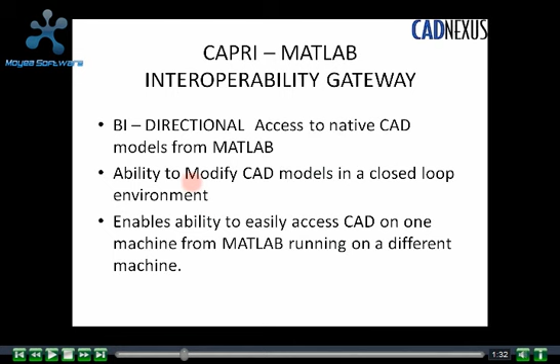What you're about to see is a demonstration on the CAPRI-MATLAB interoperability gateway. The CADNexus MATLAB CAPRI Design Toolbox provides MATLAB users with a way to access native CAD models from within the MATLAB environment. As you can see, this will enable you to do optimization, design space exploration, and analysis directly on the CAD model while maintaining associativity between the analysis model and the CAD model itself.

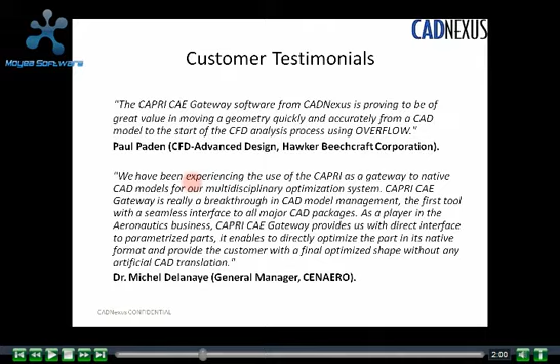In this demo, we illustrate a simple interaction between MATLAB and CAD using CAPRI. Having the CAD window open is optional, but we use it here for display purposes. More complex design and optimization workflows can be built using CAPRI functions in M scripts. So we can call methods on the CAPRI API directly from the MATLAB command line.

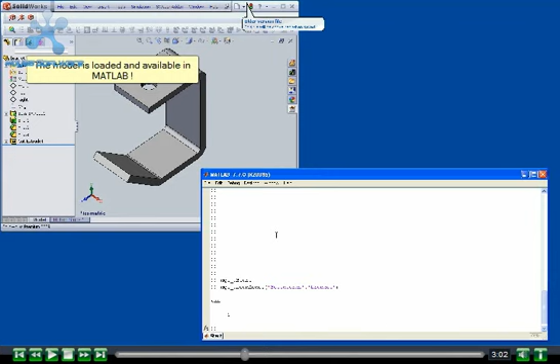So the first thing we typically do to establish a CAPRI session is execute a uStart. And once a session has been started, we can then load a model. So what I'm going to do now is load the basic bracket model into SolidWorks. Assemblies can be loaded by using the top-level assembly name. So shortly, the bracket model will be displayed in SolidWorks. And the model is loaded and is available to the MATLAB command line interface via CAPRI.

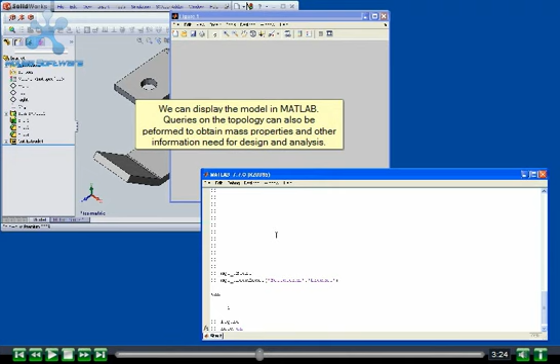So now we can generate a figure, display the model in MATLAB. Queries on the topology can also be performed to obtain mass properties and other information needed for design and analysis. And what we're trying to do is illustrate that you now have access to all of the geometry and properties of the model or assembly available to you at the command line in MATLAB, so that you can drive those parameters using an optimization or any number of analyses that you might want to do.

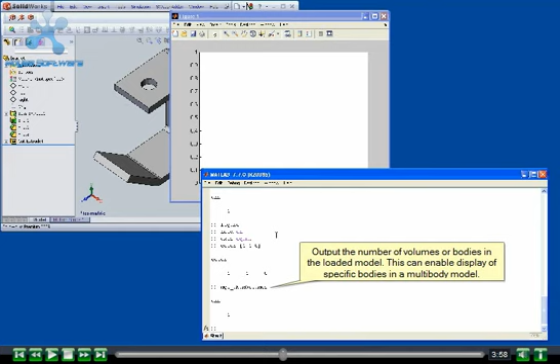Here's the number of volumes or bodies in the loaded model. This can enable display of specific bodies in a multi-body model. In our case, there is only a single volume here. Thus, the answer is 1. So as we plot the model, what we're getting here is a tessellation, a watertight tessellation from that volume. And this tessellation is guaranteed to be watertight.

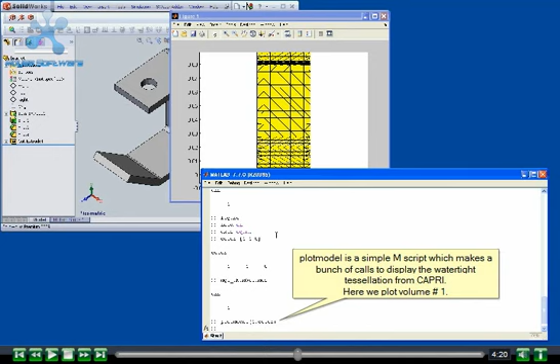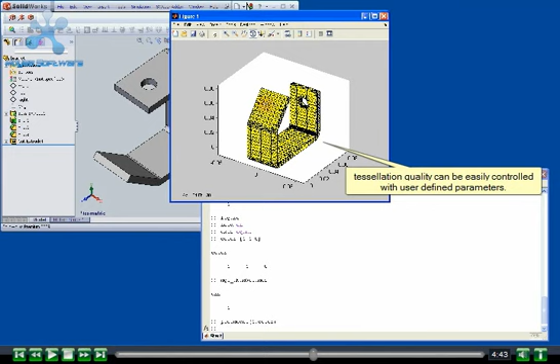And rotating this, we should be able to see that it is indeed the bracket model that is being displayed in SolidWorks. The tessellation quality can easily be controlled by a number of parameters that are taken to that call, essentially to control the density or the coarseness of the triangulation. Next, we'll query and modify parameters in the model and observe the effects.

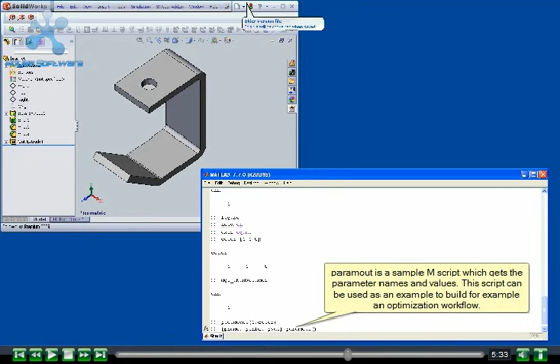So here, paramout is a sample M script which gets the parameter names and values. This script can be used as an example to build, for example, an optimization workflow, or as the starting point for it. And it returns a name, info, and value for that parameter set. So we now look at pName, which provides a list of real parameters. Others are filtered out. More detailed information on the parameters is also available. This includes the types, units, dependencies, and expressions, and so on that are needed for design.

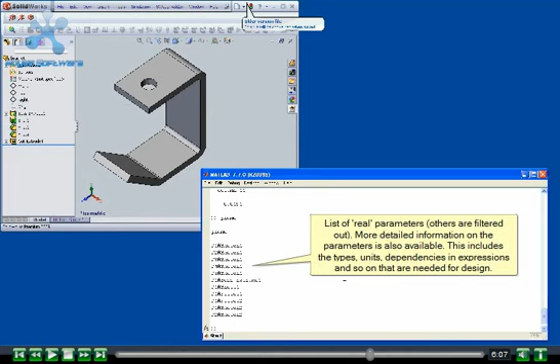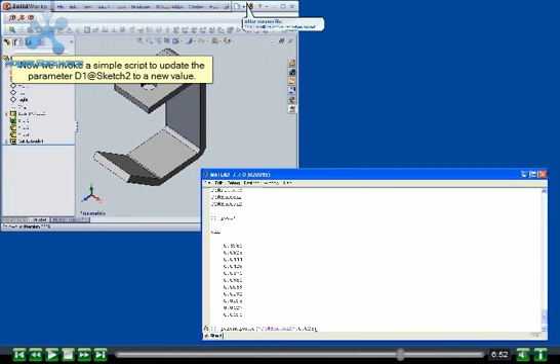Looking at the p-value array, we get the corresponding values for those parameters. And now we're going to do a parameter update call for sketch 2. And we want to reset its value from 0.127 to 0.025. And again, this interaction is brokered through CAPRI. So there you have the increased radius in the hole in the bracket.

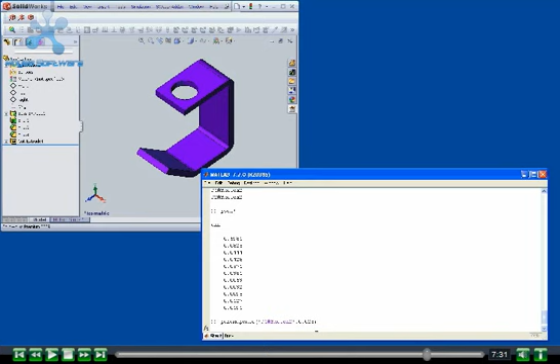Essentially, CAPRI underneath called for the change in radius value on that parameter and instituted a regen of that part. And here's our bracket in MATLAB space before and after the results of the parameter update. And changes can be tracked and rolled back. The user can easily configure the ability to do this.

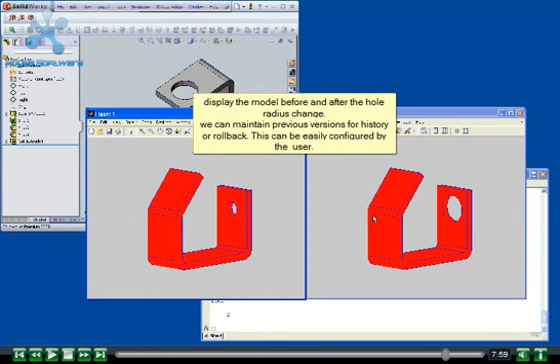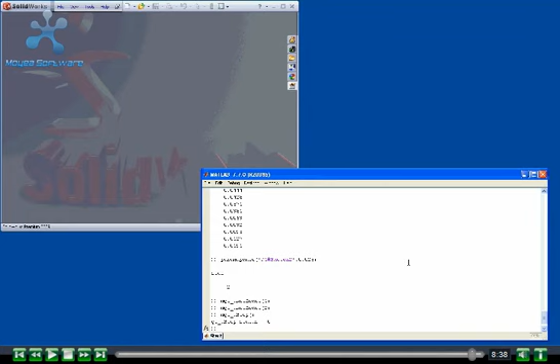Since we're done with our model, we want to free up resources that have been allocated to handle it. So the first thing we do is call release model, and that closes the CAPRI session. And to completely release any remaining resources, we execute a uStop. And that concludes our demo.